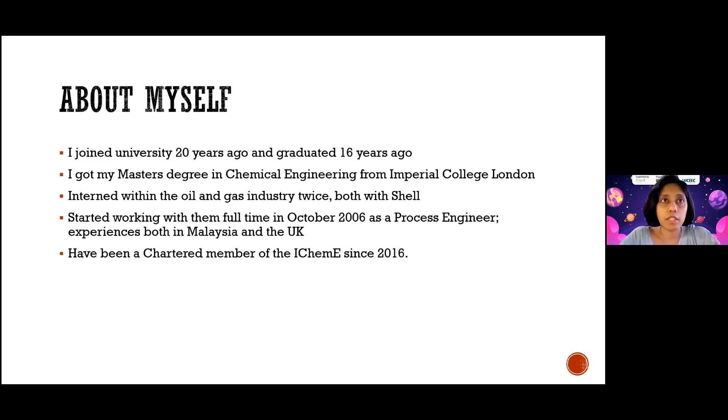So let's move on to the main part of my presentation today: chemical engineering, what and why. To put it very simply, and you're probably very familiar with this given this is day 2 of the event.

To define it, chemical engineering involves the creation and development of processes to produce, change, and or transport products and materials in a safe and cost-effective way. It also involves investigation of problems and designing solutions for a variety of industries in a safe, efficient, and sustainable manner. Now this is a lot of words, but what it basically comes down to is...

when you've got a raw material of some sort, be it oil and gas or a chemical or some form of agricultural product, it's great. The core product or original raw material is very useful, but we can't, as human beings, use them in their original form. You need to transform it from one form to the other. That's where you need to apply chemical processing, or many different forms of processing, in order to get it from raw material A to end product B.

And that's where the chemical engineer comes in, because as part of chemical engineering or process engineering, as I've done, you would be trained to manage or design the processes that transform these products from raw material to end product. The areas and industries in which chemical engineering knowledge can be applied are extremely vast.

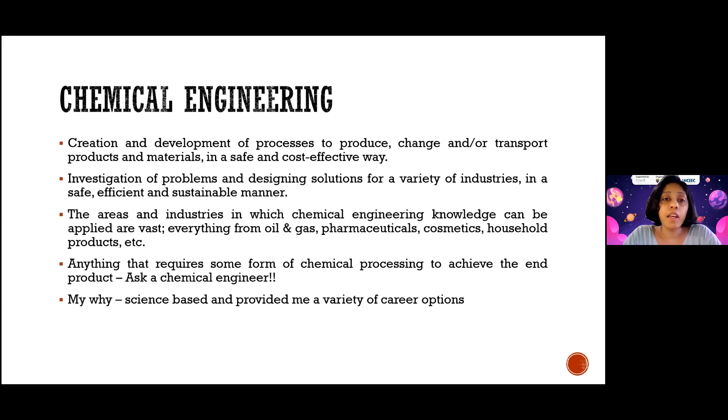Chemical engineering appealed to me specifically because it offers a variety of different career options - oil and gas, pharmaceuticals, household products. There's a variety of different industries that require the skill sets of a chemical engineer, whereas from my perception there may not have been as wide an option in some other areas of engineering. This is purely the reason why I decided to go for chemical engineering. Of course, everybody has their own why, but I'm choosing to share mine here today.

I'll move on to why oil and gas for me. So oil and gas in today's day and age, whilst there is plenty of work going into development of renewable energies and other forms or sources of energy, oil and gas still remains today in industry, in home use, in transport, one of the most important sources of energy there is.

From a very simple perspective, almost everyone, or you yourself, probably drives either a petrol or diesel car. That's oil and gas - the petrol and diesel that you put in your car is one of the main end products of the oil and gas industry, and you wouldn't be able to get around without it. Yes, there is a huge amount of development in the electrical vehicle industry, and it's moving that way, but from a global perspective...

Not just in cars, but in industry and in terms of systems and industries in place to support economies of many, many countries, especially developing countries, oil and gas plays a very important role still. It is vast in terms of both source material and products. There's still a huge amount of source material, natural oil and gas reserves available in the world today. Not as much as there was a few decades ago, but processes and systems are getting more and more complex and detailed in their way to extract all of these reserves little by little.

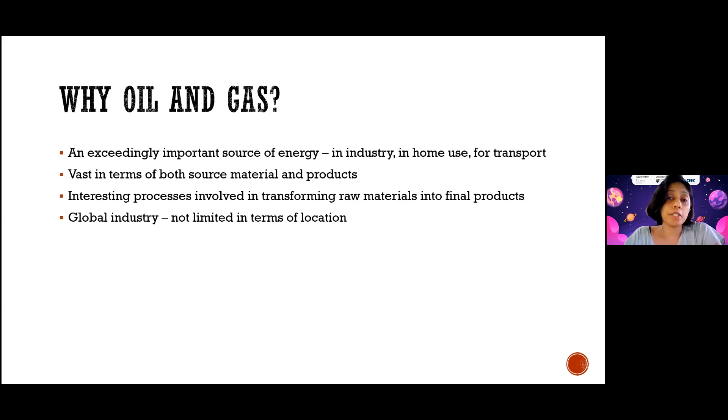Of course, it is also a global industry - something else I found always very attractive about oil and gas. You're not limited in terms of location. You get oil and gas in Malaysia, in Asia, and Australasia, but you also have oil and gas in parts of Europe, in the UK, in the US, in Canada, in South America. So there are a variety of different areas that have oil and gas reserves and production - very much a global industry, not limited in any space as such.

So I will move on now to giving you a brief overview of the industry itself, just so you have some clarity on this. Let's take a step back - what is oil and gas? Oil and gas can also be known as hydrocarbons. In the industry, when we're talking on a day-to-day basis, you might very well come across the term - how are we going to get those hydrocarbons from point A to point B, for example?

The reason for this, of course, is oil and gas are made up of very complex molecules - maybe not as complex as some, but complex enough. They're primarily made up of carbon and hydrogen atoms, hence the name hydrocarbons. These are not the only atoms and elements that make up oil and gas - there are a variety of other elements that make them up, other gases like carbon dioxide, oxygen, nitrogen, sulfur, lots of other elements that come into play, but primarily carbon and hydrogen.

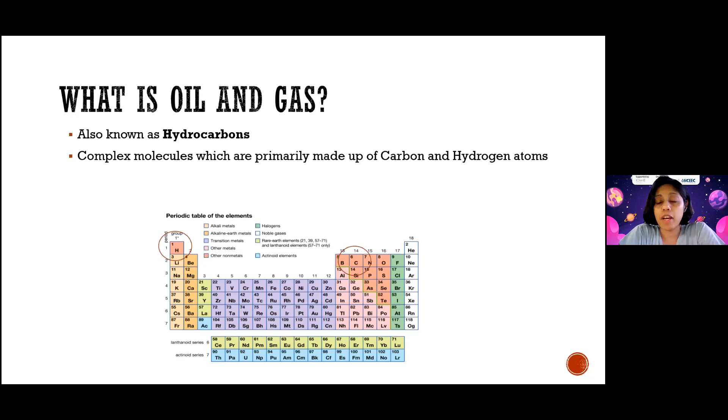For those of you who are just out of high school, pre-U students, this will look very familiar - I'm sure if you've done chemistry, your periodic table. I've circled the hydrogen and carbon atoms there on the table just to indicate to you which are the main elements that you get in a hydrocarbon molecule, a hydrocarbon chain molecule, which is what oil and gas is made up of.

So hydrocarbons, or oil and gas, can be found in their natural form in what is termed reservoirs - oil and gas reservoirs. These can occur either underground or underwater - when I say underwater, I mean in the ground underwater, of course, not in the water itself. And they're called crude oil - in its natural form, oil is called crude oil and gas is called natural gas.

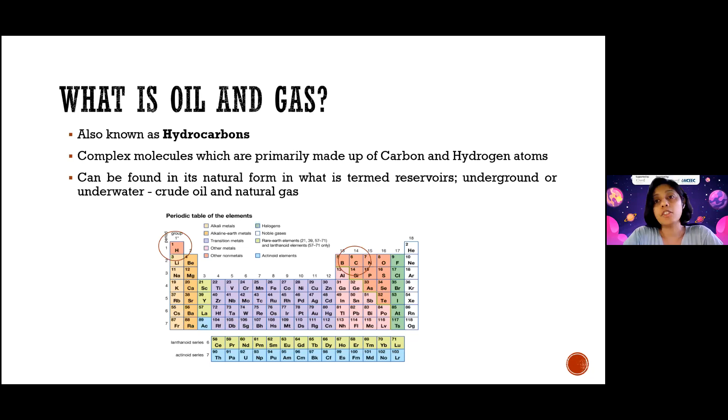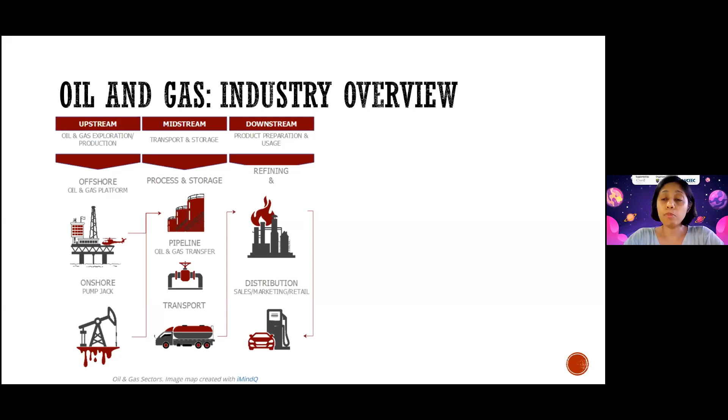I move on to the industry overview. So you've learned about the actual product, what it's made up of, mainly carbon and hydrogen. Now we move on to oil and gas, the industry overview. To put it quite simplistically, the industry is split into three main sections. Obviously there are subsections, but for this talk it makes sense to look at the main sections first: upstream, midstream, and downstream.

I'll start by explaining the upstream section. It's also known as the E&P sector, or exploration and production sector, because this is the area of the industry involved in discovering underground and underwater crude oil and natural gas reserves. It also involves the processes and skill set to drill into the ground, be it in the sea or on land, what they call oil and gas wells, to extract these resources and then pipe or transport them further down the process to subsequent operations and processing of the raw material.

So on the far left side of the diagram I've shared, you'll see an offshore oil and gas platform, the more popular of these drawings, with the little helicopter. This is a typical symbol for an oil and gas platform right in the middle of the ocean, where oil and gas is drilled from the ground under the water and extracted up onto that platform, where a simple bit of processing takes place. After which it's transported further downstream into the rest of the process, where further refining takes place.

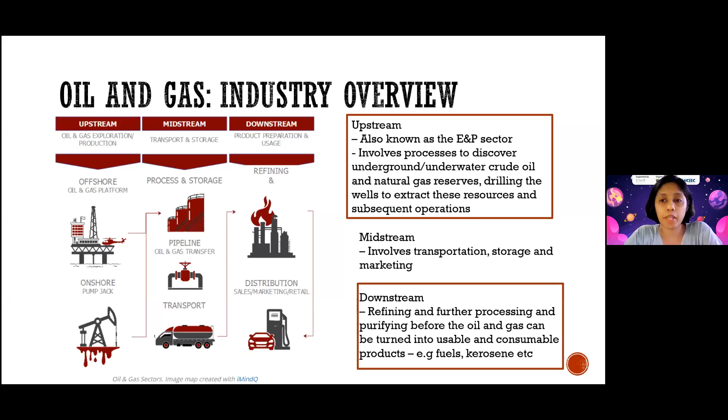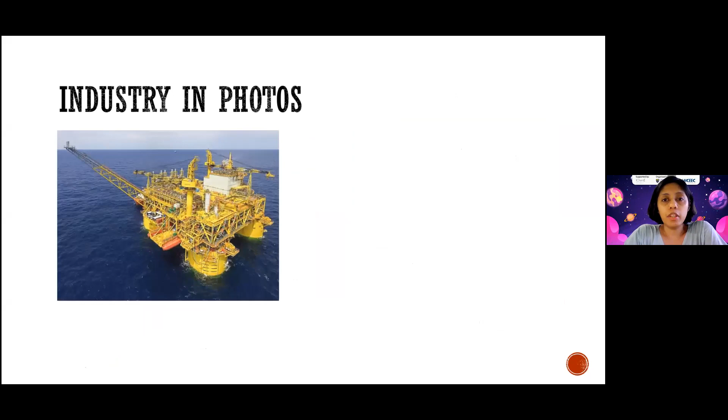But if you notice, when you drill down and look at the bottom of the ocean, there's a lot of stuff going on there, because there's a lot of equipment, piping, and control systems in place that are set up to process and efficiently manage the extraction of the oil and gas from the ground onto the platform, which is then further processed and sent to a different location to be refined further. I've shown these photos to illustrate how complex it can be under the water compared to what you see on top.

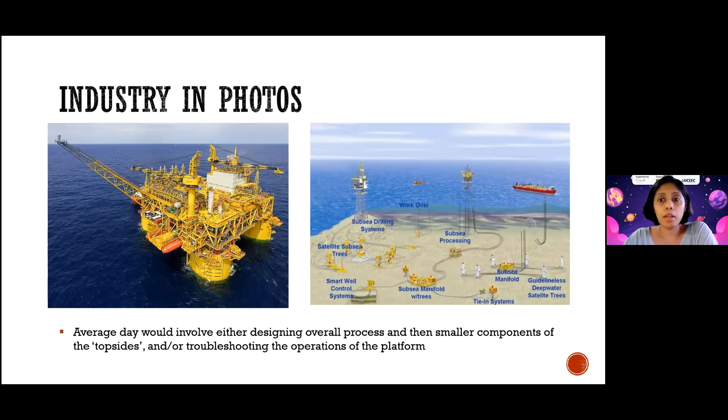Now, refineries, or the final refining of oil and gas, fall under the downstream part of our industry. That's where everything has been drilled and extracted out of the ground, then transported down to somewhere, usually on land, because the downstream refining and processing of oil and gas always takes place on land, since there's a lot more complex work and processing going on, so you need the space. For that, it's best to be on land, not in the middle of the ocean.

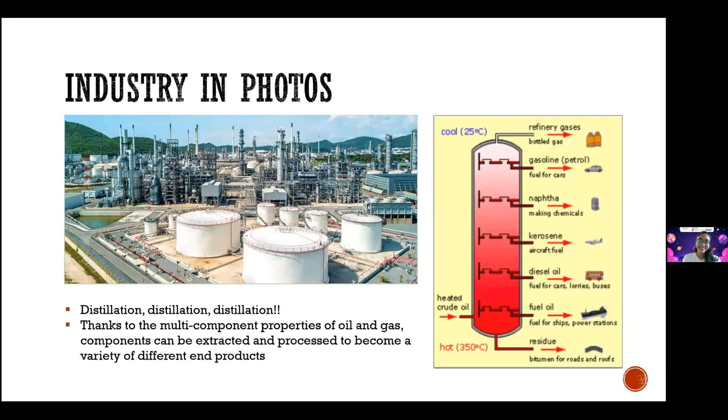So you will see here on the right, I've copied out a typical diagram of the distillation column. You get heated crude oil, for example, coming in at the bottom, all in liquid form because it's really, really hot—this one shows 350 degrees C, you don't want to be anywhere close to that. At the bottom, the stuff that still remains in liquid form is taken off as residue and fuel oil, for example, which can be used for roads or fuel for ships. You need really heavy stuff for that.

But because it's heated to such a high temperature, most of it transforms into vapor and starts traveling up the distillation column. As it cools down to specific points, the component within the oil and gas that condenses at that particular boiling point gets extracted out at that point. So, for example, diesel oil gets extracted out at a particular temperature. The rest of the bulk oil continues traveling up the column in vapor form. When it hits another temperature, kerosene gets condensed off, and the rest keeps traveling up. At a cooler temperature, gasoline gets taken off, and then at the highest point, the lightest components, still in vapor form even after being cooled down so much, get taken off right at the top of the column.

So this is where the distillation process, something very simple we can observe in our day-to-day life, can make such a huge difference in terms of extraction and efficiently maximizing the benefits within the oil and gas industry downstream—one that is very, very close to a chemical engineer's heart.

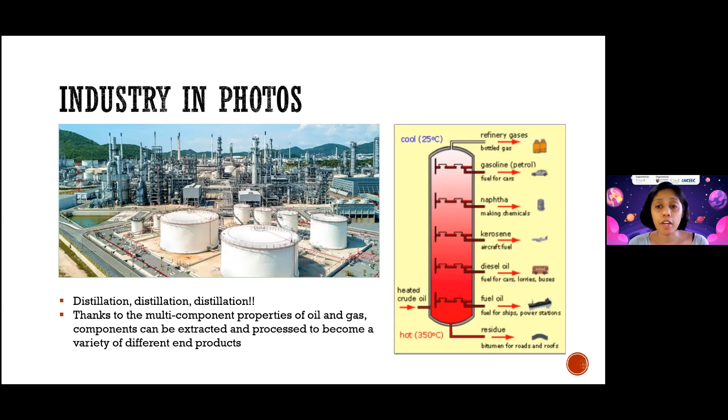I will go on to discussing a few common misconceptions in our oil and gas industry. This is my last slide for today, so after this I'll be ending the talk. Let's end on some misconceptions.

First of all, oil and gas personnel get free petrol—absolutely untrue. I wish it were true, that would be wonderful of course. I've been asked many times in my time working, 'Hey, do you get free petrol since you work for Shell?' And I've always had to disappoint people by saying, no, I'm afraid not.

Some people are under the impression that all oil and gas work is located offshore on an oil rig. Again, not true. As you can see from my presentation, there are very different parts of the industry—upstream, midstream, downstream—all of which require people. So yes, there are people located offshore on an oil rig, but there's a lot of people located in all other parts of the industry as well. And of course, people like myself, the chemical engineer, are considered the technical experts in the industry, but there's a lot more that makes an industry work.

You need people in the legal department, finance, marketing, sales, people who project manage things, who develop business, who continuously improve the business. So there's a whole different myriad and variety of different skill sets and industry backgrounds that come into play in the oil and gas industry.

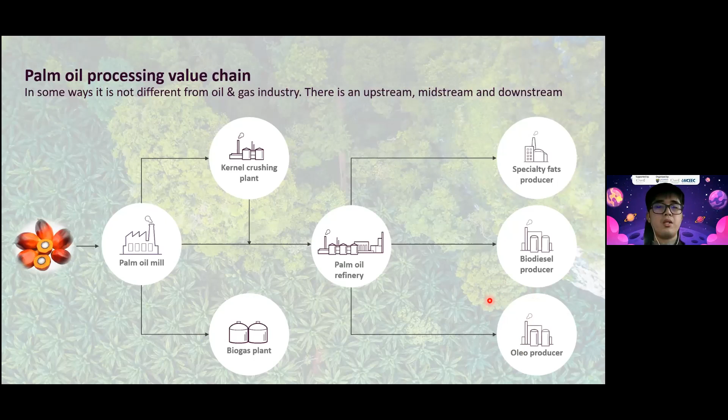Okay, so now I will go a little bit more detailed into each stream of the value chain. So the starting point of the journey - to have palm oil, we need to have plantations, right?

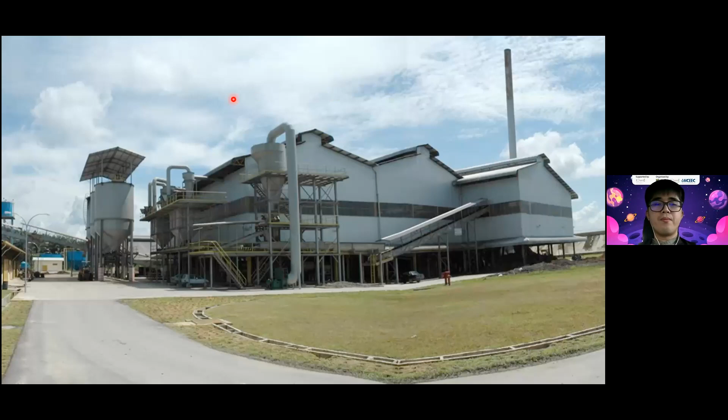Okay, so this picture here is an example of an oil palm mill, right? So what happens here is that the harvested fresh fruit bunch, or FFB, will be sent to this mill, and then inside this mill there will be a series of processes where we separate the fruits from the bunch, and then we extract the oil from the fruits. So what are the processes?

Then it will go to threshing. What threshing does is remove the fruit from the bunch. Then the fruits will go through digestion and pressing. This is the main process where the extraction of the palm oil happens.

So once we do the digestion and pressing, all the liquid, which is the oil, will be sent to a clarifier for clarification. What clarification does is basically separate the solids from the oil, so the solids eventually settle down in the clarifier, and the upper layer will be the oil. This oil will be sent to the centrifugation system, which is another separation system - like a final polishing for the oil. Then after hitting this centrifugation, we get our final product, which is our crude palm oil, or in short, we call it CPO.

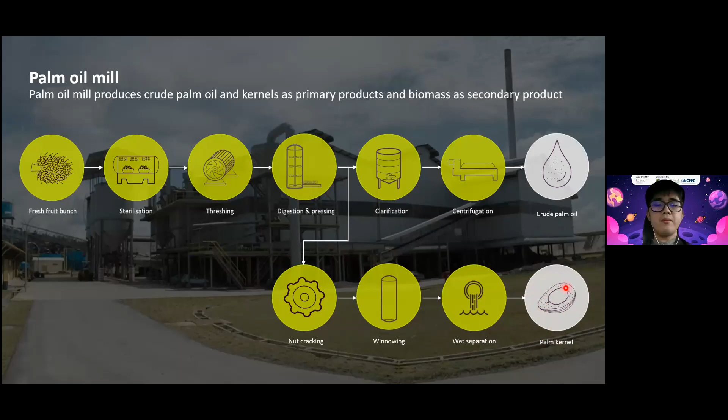So how we refine the oil is through basically 3 steps: neutralization or degumming, next bleaching, and then deodorizing.

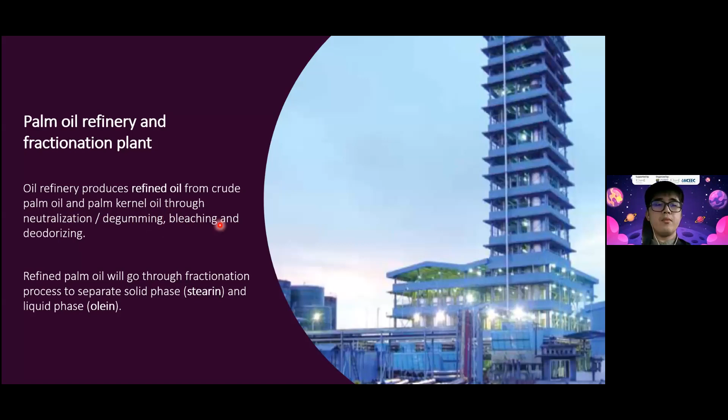So here we see there's two kinds of refining method, but essentially the function is the same. Degumming is basically to remove the phosphatides, or what we call the gums, from the oil. Same goes to neutralization. Bleaching is essentially to remove the color from the oil. And deodorization is to remove the odor from the oil.

After this process, we will get the final product as refined, bleached, and deodorized palm oil, or in short form, we call it RBD palm oil or RBD PO. This final product and the raw material will have significant difference, which I will show in my later slide.

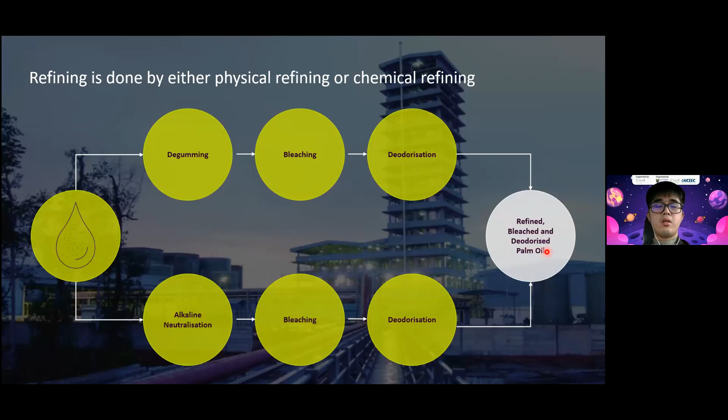First, the degumming and neutralization is happening in this reactor. So we add the reagent. For degumming it will be phosphoric acid, then for neutralization we're adding our alkaline. So here you will react, and this will remove the gums through the centrifuge here, you can see from this line. So actually this is where the first step of refining is happening.

Then for bleaching, it will occur in this vessel we call a bleacher. We'll add in our adsorbents to bleach out the color from the oil.

Then the deodorization is actually at this session. It involves a vessel, here we will do the heating, and then we have a column for distillation. After here, we will get our product at the bottom, which is RBD oil or RBD palm oil.

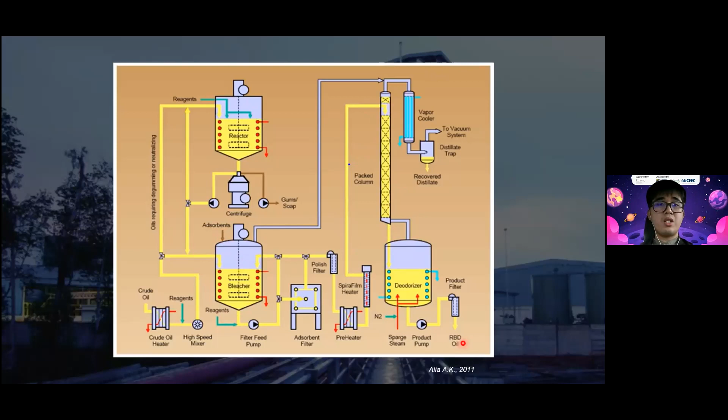Okay, then after refinery we'll go to the downstream session. The first downstream session I mentioned earlier is actually what we call specialty fats production. What happens there is the RBD PO that we produce from refinery will undergo a process generally known as fat modification.

So essentially what we're doing is we are modifying the physical properties of the oil, so that once we modify that property, the product will be able to apply in numerous applications, especially in the food industry. For this fat modification, we have three types.

First is hydrogenation, here we would either do partial or full hydrogenation. Then we also have this interesterification, which can be chemical and enzymatic. Then next we have fractionation, which can be dry fractionation, solvent fractionation, or detergent fractionation.

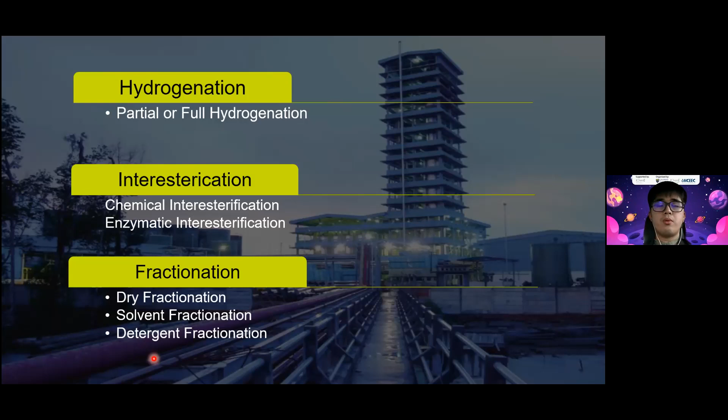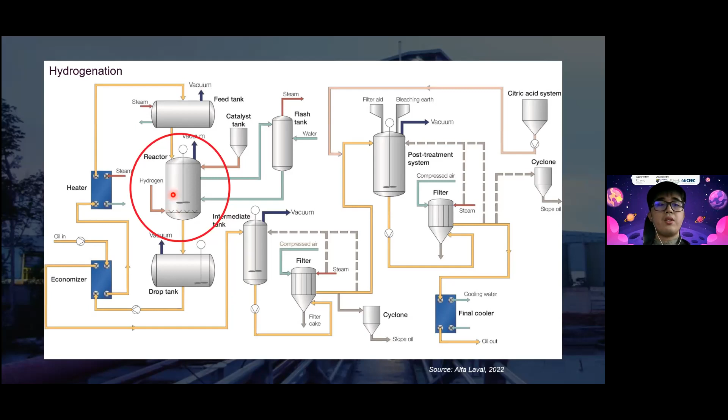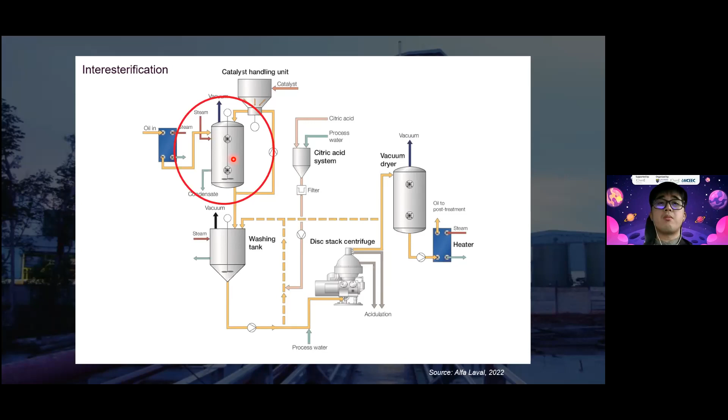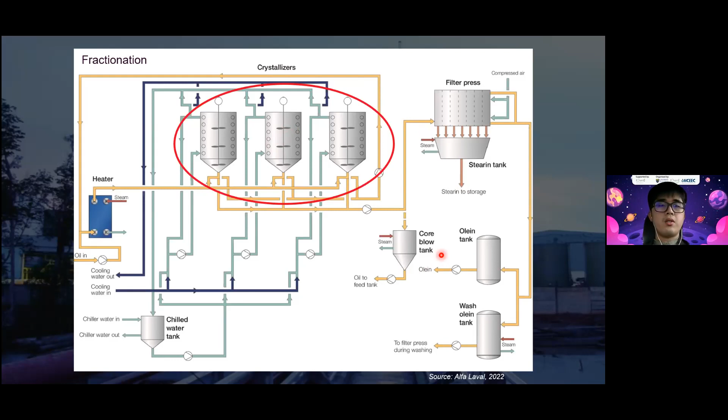For example, from olein we can split into soft PMF, palm mid fraction, which can be used as margarine. Then we have super olein, which can be used as salad oil. For the soft PMF, we can split again into hard PMF, which can be used as cocoa butter equivalent, mostly seen in chocolate-based products.

We also have mid olein. From super olein, we can also crystallize to get mid olein, and we also have top olein, which can be used for very cold stable salad oil.

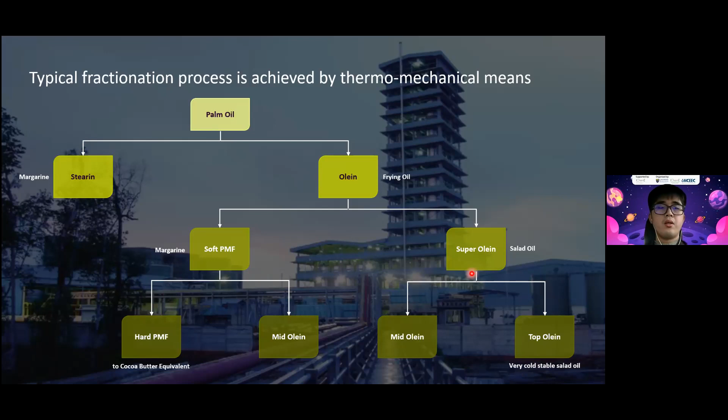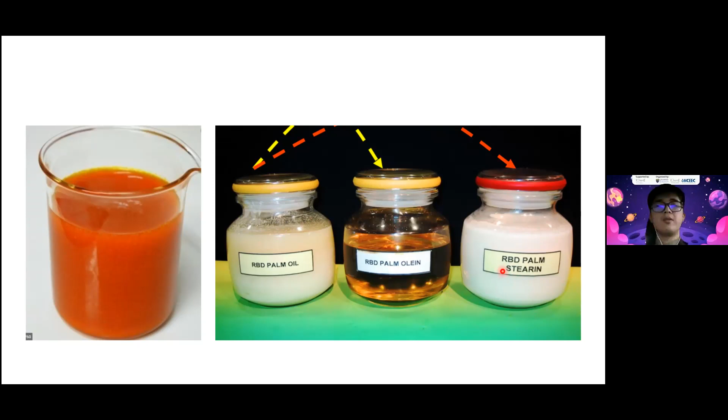Now I have covered the refinery and the specialty fat section. I'll move to the next downstream process, which is oleochemical production, or the oleochemical plant.

Palm-based oleochemicals include fatty acids, fatty alcohols, fatty amines, and methyl ester using palm oil feedstock. These products are widely used in cosmetic and personal care applications like skincare, hair care, oral care, as well as detergents, soaps, and cleaners. So for specialty fats and refinery, most applications are in the food industry, but for oleochemicals, they are in cosmetic, personal care, and cleaning applications.

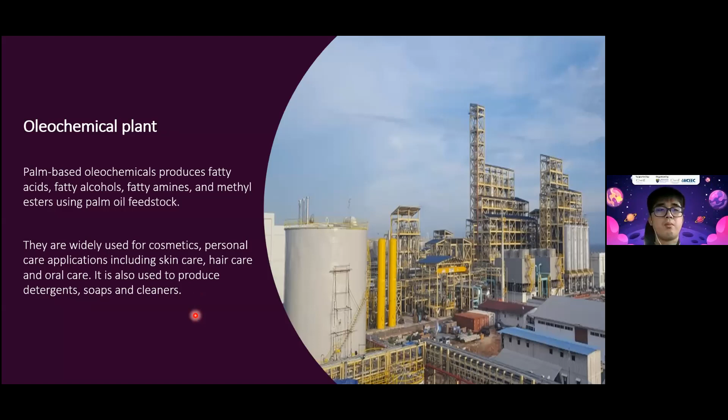I'll go through a bit about the process. The pathway within the oleochemical industry - in general, oleochemicals can be categorized into 2 types. First is basic oleochemicals, which include 5 chemicals: fatty acid, glycerin, methyl ester, fatty amines, and fatty alcohol. These are the basic oleochemicals, defined as the base or foundation for their derivatives.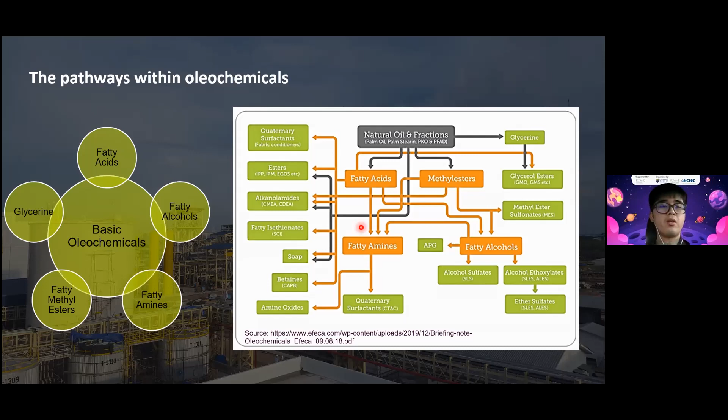These are just examples of the typical processes happening in the oleochemical industry. Since I'm now working in the oleochemical industry, this is very close to me.

So the glycerol eventually mixes with water, becomes our crude glycerin. This glycerin water is further treated and evaporated to produce the crude glycerin. The fatty acid will also go through further processes. So this is basically the first step of the oleochemical process.

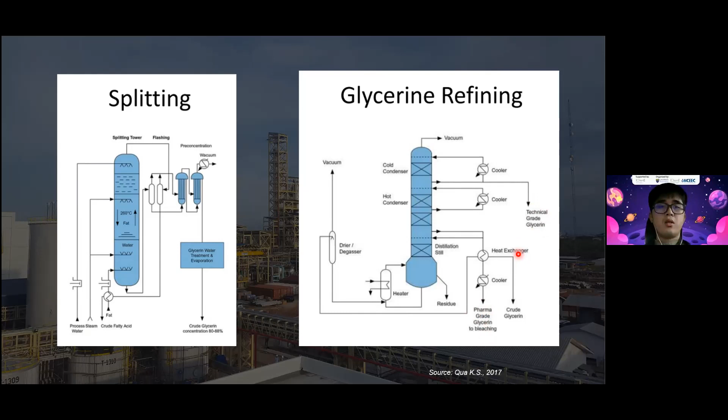Then in the distillation columns, we will have a light end and a heavy end. So basically we are separating the carbon chains, the different fatty acids, from the crude feed itself. For fractionation, it's the same function—we feed in the crude, then separate it out by distillation to get different blends of fatty acid.

The difference is that fractionation is able to give us a pure blend of fatty acids, which cannot be done in the distillation process. So these are the major differences between the two processes, but essentially in terms of working principle, they are the same.

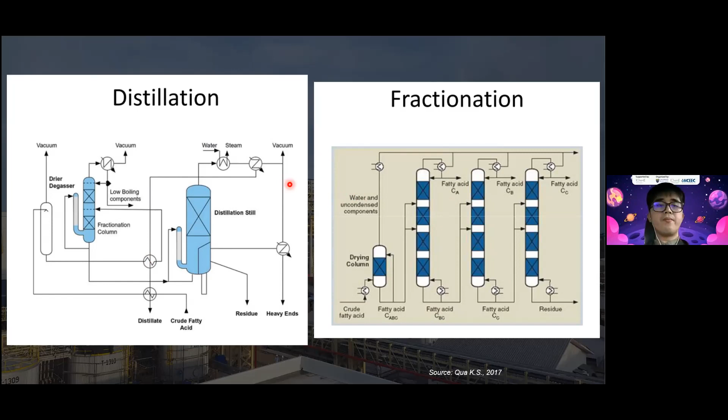Okay, so I've already explained the whole production process from CPO all the way to the downstream, like specialty fats and other chemicals. So all the oil we produce is used in various industries—we can see it used as food, cleaning agents, cosmetics, and healthcare products. With that, it's not unrealistic to claim that more than half of the products on sale in supermarkets are made with palm oil.

All right, so now that I've covered the palm oil processing industry, since this event is more about giving exposure to pre-U students about chemical engineering, I would also like to touch a little bit on what a chemical engineer is doing in this palm oil industry.

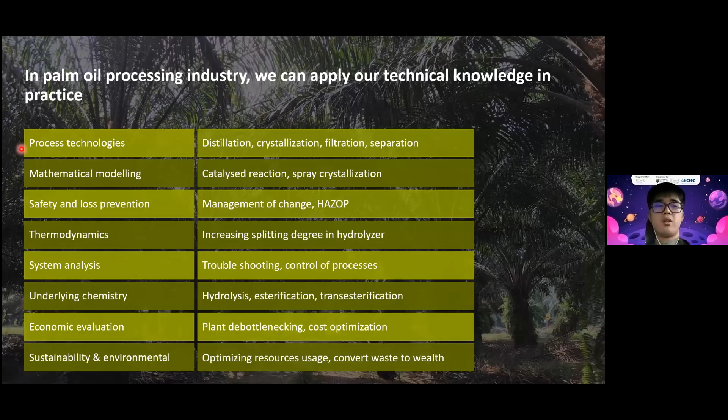You can also see chemical engineers from design companies - those are the people that actually help design the plant. You can also see chemical engineers in legalization areas, R&D areas, project management areas, and definitely in academia.

You can also find chemical engineers in quality assurance of the palm oil industry, and also in sustainability development, R&D, instrument and control, sales, marketing, health, safety, risk management, and even computer applications. So for all these areas, you can definitely find chemical engineers, and these are all very critical areas in the palm oil industry.

That being said, we wouldn't make very successful engineers if we don't equip ourselves with transferable skills.

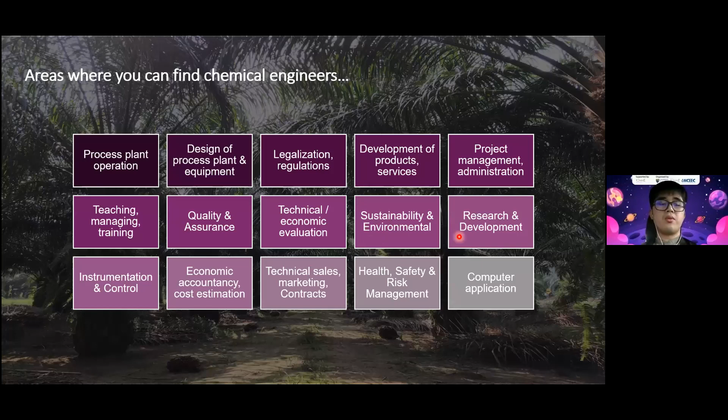One thing about chemical engineering is that we are not just learning, we are not just very strong in technical knowledge. As I mentioned earlier, in my previous slide, the definition of the role of chemical engineers defined by IChemE - one major thing is that we are not working in silos. As chemical engineers, we are always collaborating, working with people from other disciplines.

So to do that, we not only need technical skills, but we also need transferable skills. These transferable skills include managing relationships, leadership in professional roles, and communicating ideas formally. These are very important skills, not just for chemical engineers, but for whatever profession you're going to be in - these are all very important transferable soft skills.

So what are the industry's expectations of chemical engineers nowadays? The industry expects us to be able to apply our knowledge and understanding in practical situations, because we are engineers - eventually we are tasked to solve problems in the processes. They also expect us to not be working in silos.

We should be able to plan, manage interpersonal relationships, and demonstrate leadership and communication skills. We should also commit to high standards of professional and ethical conduct as an engineer. Lastly, we are expected to commit to continuing professional development related to our profession, knowledge, and competence.

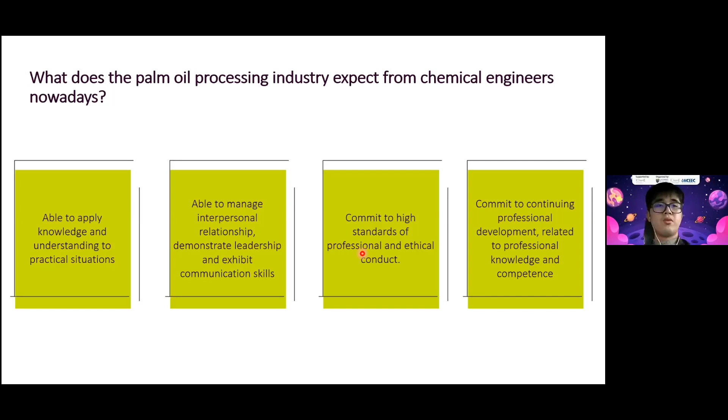So how are we going to develop and excel? We must definitely know how to connect with people, go back to the basics of all the fundamentals we have learned, and uphold our professionalism.

With that is how we can make good chemical engineers, not just in the palm oil industry, but in other industries as well. I believe that's the end of my presentation. I'm sorry if I got a little off track, so I'll pass it back to the MCs. I hope my presentation can shed some light to the participants here today about the palm oil industry itself, and also about chemical engineers' role in the palm oil industry. Thank you.

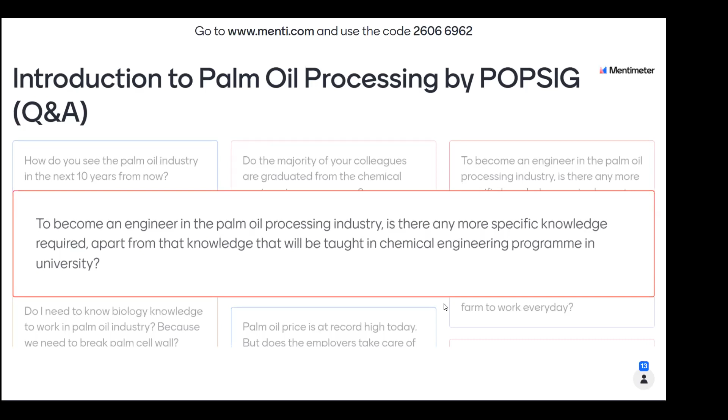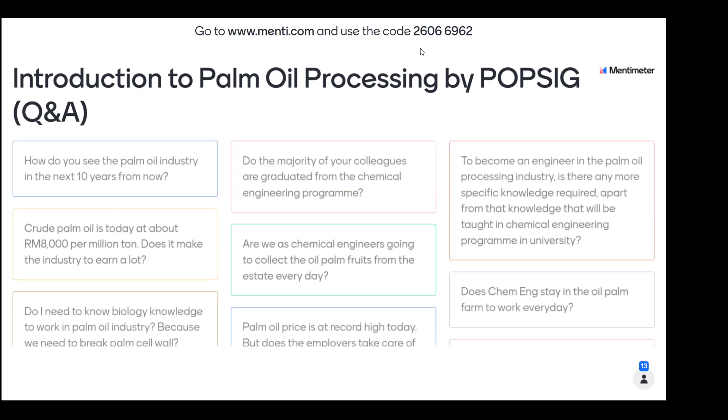For me, again, I would like to thank IChemE-UM for inviting me to this event. I'm very happy to join this event. I know most participants are pre-U students, so I'm also very happy to share my perspective on the palm oil industry and chemical engineering, just to give them a rough idea. So hopefully my presentation and sharing will give some interest to the participants here about chemical engineering, and also the palm oil industry. I hope everyone will do well in your upcoming studies in universities. So I wish you all the best. Thank you very much.